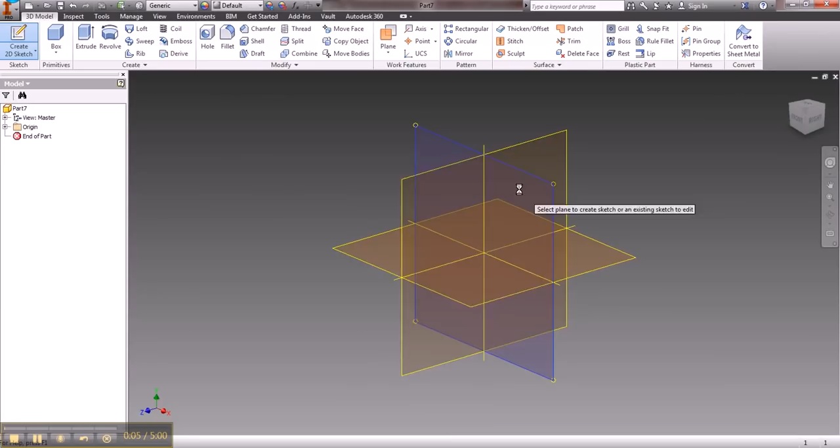Try this from the front. Let's go ahead and start with a new part file. Pick a plane right there, and draw a rectangle first.

Now this one's going to get a little confusing, so make sure you follow it step by step. So this one's supposed to be 3.17, and this one is supposed to be 1.53 tall.

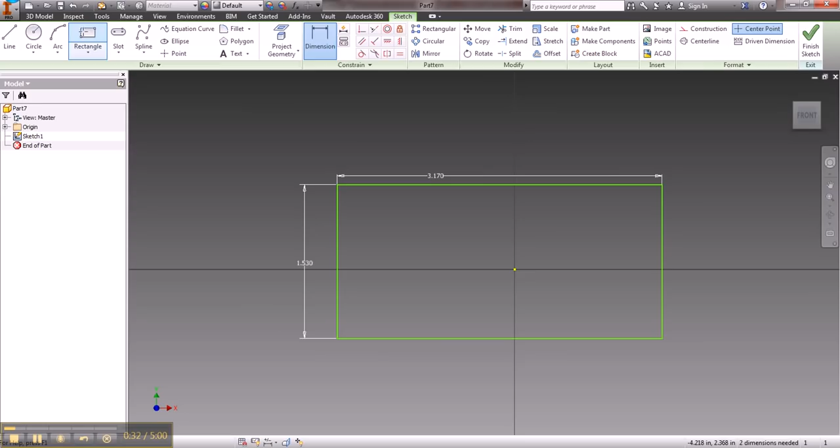Now before we go, we're going to have to draw two little squares here, and we'll use that for later on. So I'm going to go here, make a square, make sure it crosses that line there. Alright, we're going to dimension this here and here.

It's going to be 0.3. Here is a 0.06, and from here to here is again a 0.06. Alright, we're going to trim that like so, and we have to do that on the other side.

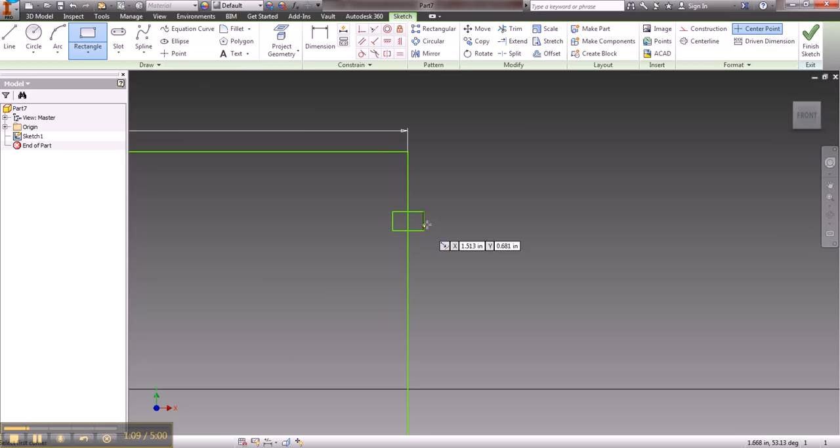Now if you're thinking we could just use the mirror command, we could, except the computer won't like it and you won't be able to use it later on this side. So we're going to do it this way so it'll work out better for you.

Okay, so again, this is 0.3, 0. This is a 0.06. From here to here is a 0.06 as well. And then we're going to go trim, like so. Okay, so you have that.

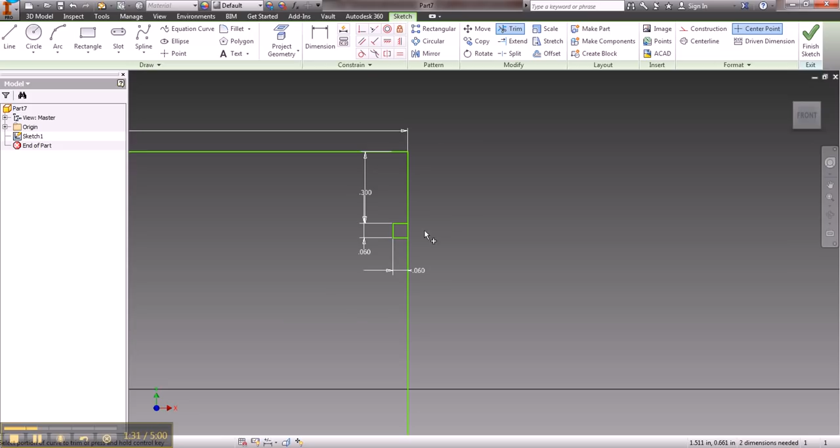Go ahead and finish sketch, and we're going to extrude this. Now, when you extrude this, make sure you pick the squares and the actual surface just like that, so we can use all of it as just one square.

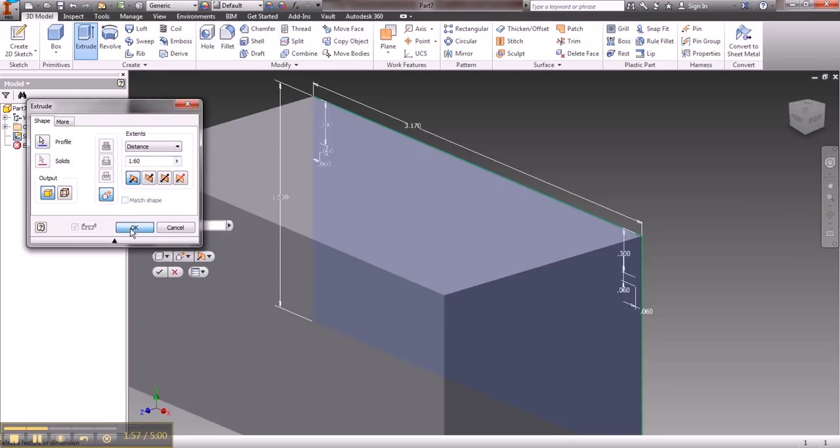We're going to extrude this as 1.60. Again, make sure everything was picked. Alright, hit OK. So now you have one solid block.

We're going to go ahead and fillet the bottom of this, alright, which is this right here, and that's going to be a 0.30. So I'm going to pick that portion there, rotate it around, right there, hit apply, go back to my 2D sketch like so.

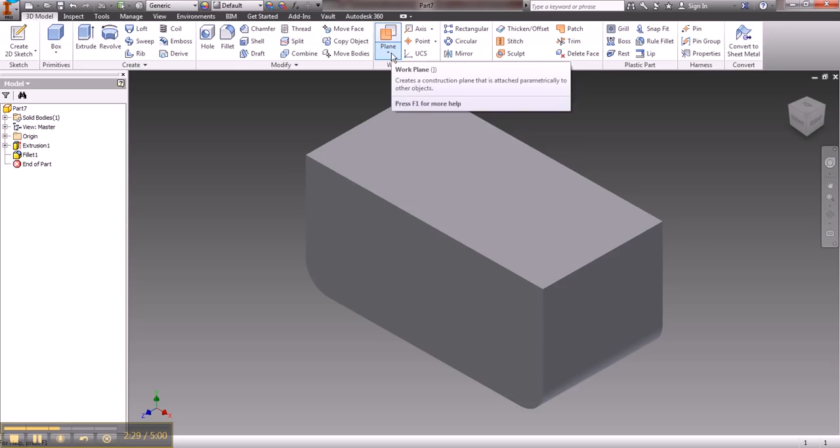Alright, now we got this crazy profile on this, so we're going to use this edge and offset a plane. So what we're going to do now is go here to plane, offset from plane, pick this surface here, and just type in 0.25. Enter. And 2D sketch, make sure you select this plane here, and we're going to draw on that.

Alright, so first thing you gotta do is we need some lines from this so we can actually use them. So I'm going to do the project geometry. I'm going to pick this line here, this line, right, and those, and this one here. Okay, ignore that bell. You should be okay.

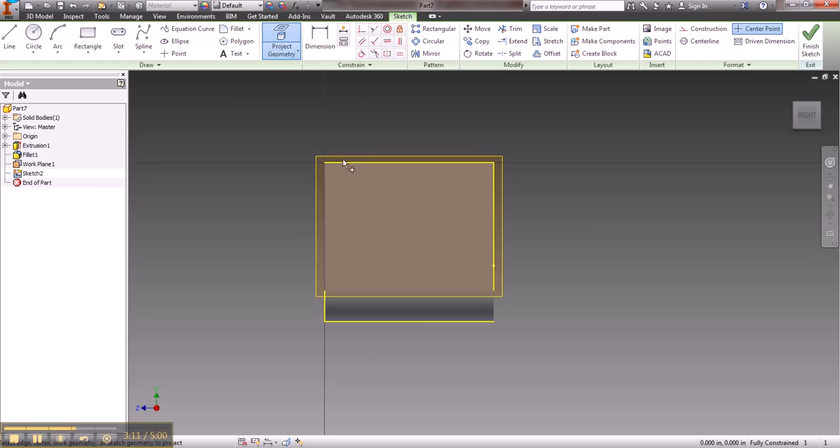Alright, so now we're going to draw some lines here first, just like we did. You can use construction lines if you want. I don't like using construction lines. I just like using the regular lines. So I'm going to draw a line here.

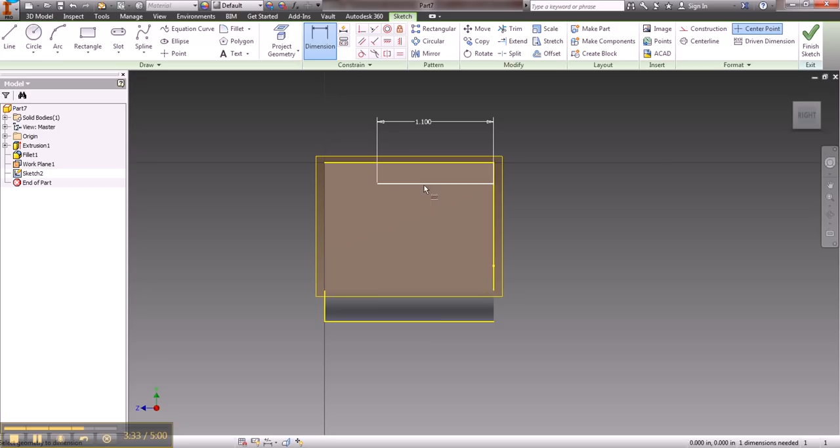Make sure it's nice and horizontal. This line is going to be 1.10 long from this edge, and it's going to be from here to the bottom here. It's going to be 1.25. Okay, draw another line.

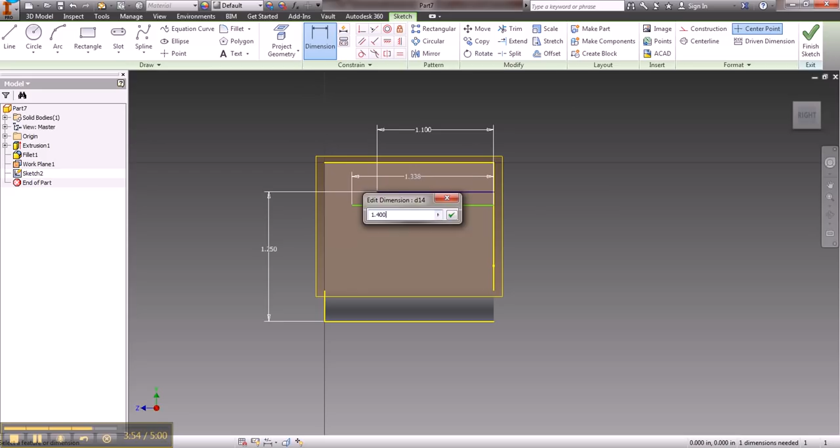Make sure it's not green or anything, just pick that line somewhere. Make sure it's horizontal. Pick that line, and that's going to be a 1.400. And that's going to be from here to here, 1.150. Alright, just like so.

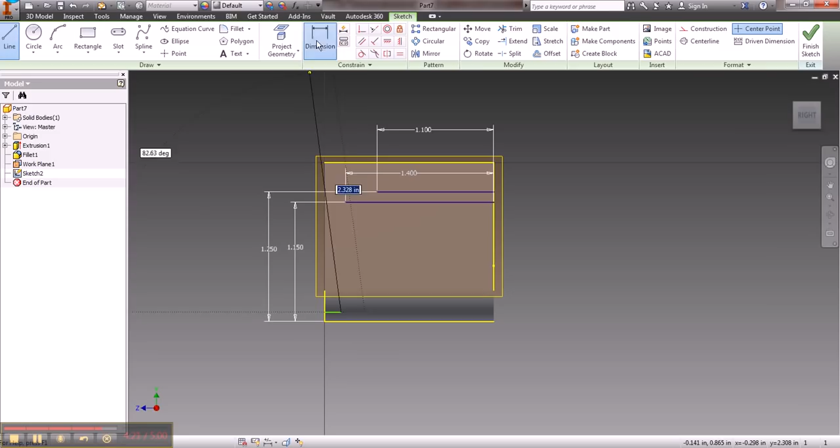Then we've got one more line here. And that line is going to go from right here. Oop, make sure it's not green. Just pick that line from here to here. That's going to go from this point to this point, and I need that to be at 0.2.

Alright, now that we have those lines, we can start drawing our shape. Alright, so we got our lines here now. Start drawing our arcs and our straight lines. So we got arc here, 3-point arc.

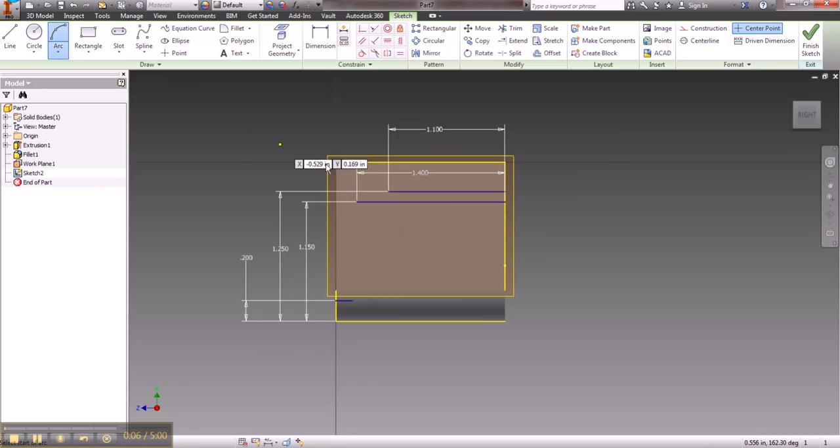I'm going to go from this point here to this point. Make sure it's going out like that. Just like that. And then the dimension there is going to be 2.301. Alright, then I'm going to switch to line.

From here to there. Right, we just connect the dots there. Then back to 3-point arc. Go from this point here to this point. It's going out. And make sure that is a 2.356.

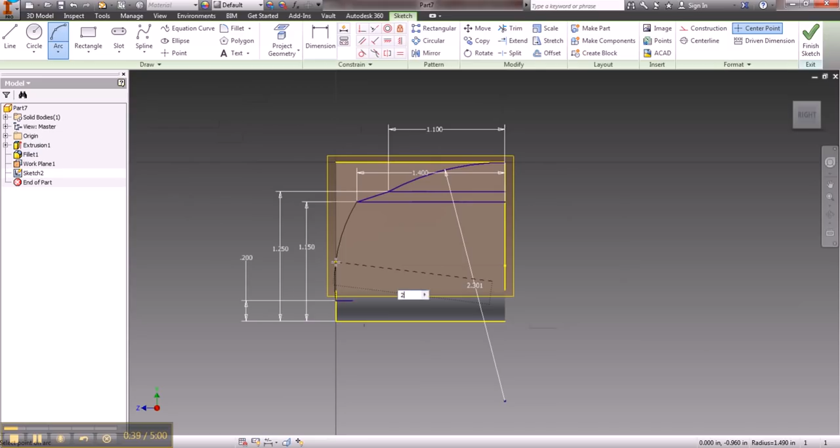Alright, and at this point we can start deleting those horizontal lines we just created. I'm going to go here, delete that, go here and delete that. Then I'm going to need to draw a line, making sure it goes to the end point of that arc right here, to this corner, then from here to that corner, and then back all the way up. So basically what I did was close out that shape.

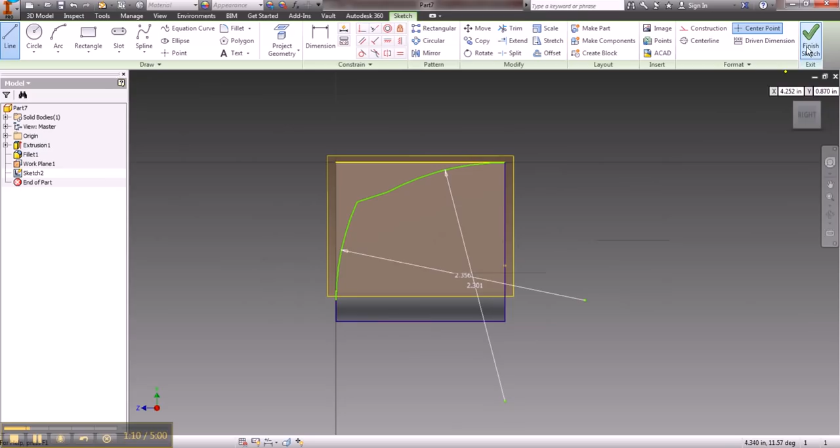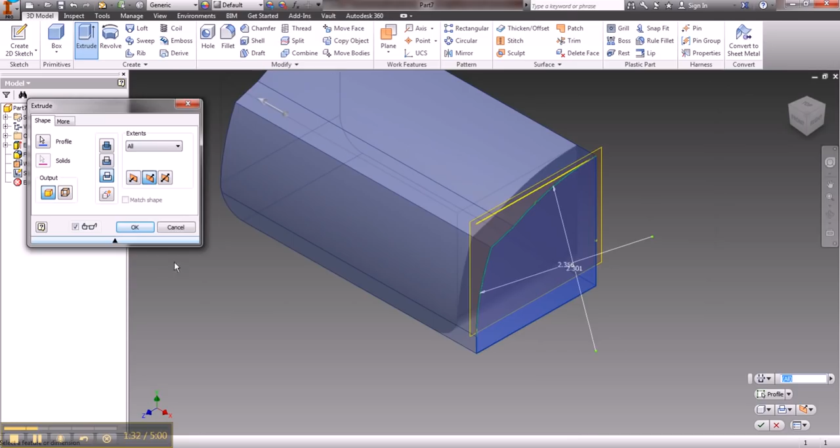Alright, I'm going to hit finish sketch. Now we're going to extrude this, but we're going to use a new command you guys haven't used: the intersect command. What that does is wherever this profile and whatever shape it was meet, it will keep that. And we want to go distance all, so it's the entire length of what we just created. Hit OK, and there you go.

Now if you want to make this invisible, you can, but we're going to use it here in a second again, so just leave it.

I'm going to go to fillet, and go ahead and do point 2 here. We're going to fillet this edge here and this edge. You can't see it, but your computer can, so if you just do that, you should be able to see it. Point 2 right there and right there. Hit apply.

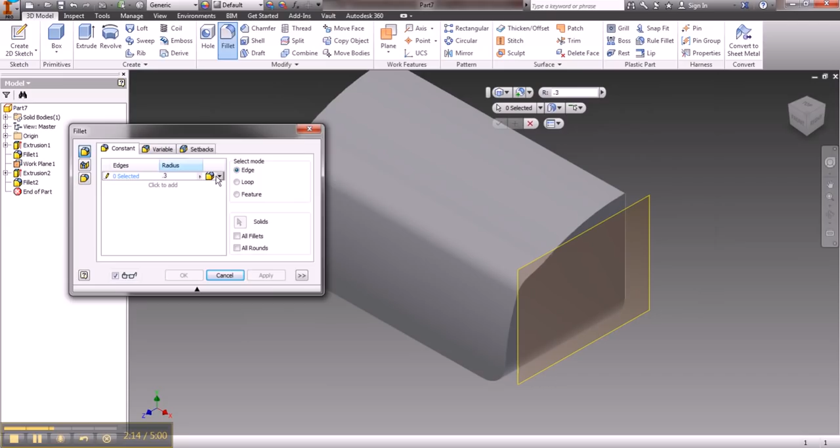Okay, now we're going to do this portion here. I'm going to fillet that again. This one's going to be 0.3. We're going to do the edges now, and it should be one whole edge just like that. It's 0.3. Apply.

And there's that. Now what we're going to do is draw the bottom portion of this. So we're going to use this plane again, 2D sketch, pick that portion there. Alright, and we're going to need a couple of strokes. We're going to use this bottom part here. So project geometry again, use this portion here and that edge there, so you're good to go.

Now we're going to go line. In this one, I'm going to make a line from here to here. I'm going to dimension that from here to here, and that's going to be 1.559. Alright, we're going to need these, and I'll show you why here in a second.

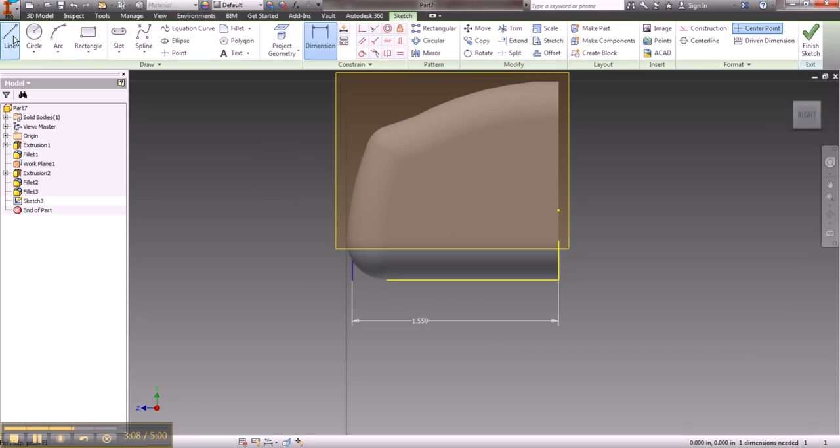It's basically we're trying to draw another shape. Pick this one, again right there, another vertical line. I'm going to dimension this one, and that's going to be 1.51. Right, just like so. I'm going to zoom in a little bit.

Now I'm going to draw a horizontal line, just make it right around here near this. Ignore that bell too, it's alright. So this one, I'm going to go ahead and just put it right on the end point, right around here, right across it, and dimension this from here to here. That's going to be 0.2.

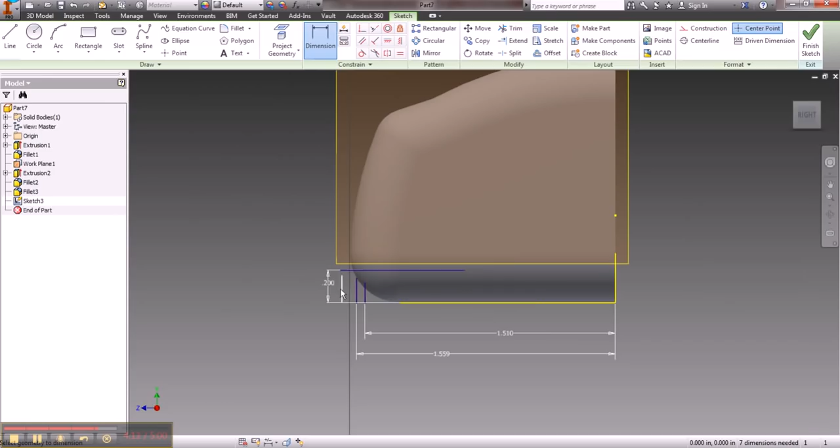We'll need one more line right here, a vertical line just like so. And that line we're going to dimension from here to here, and that's going to be 1.6. Alright, now we got all those lines.

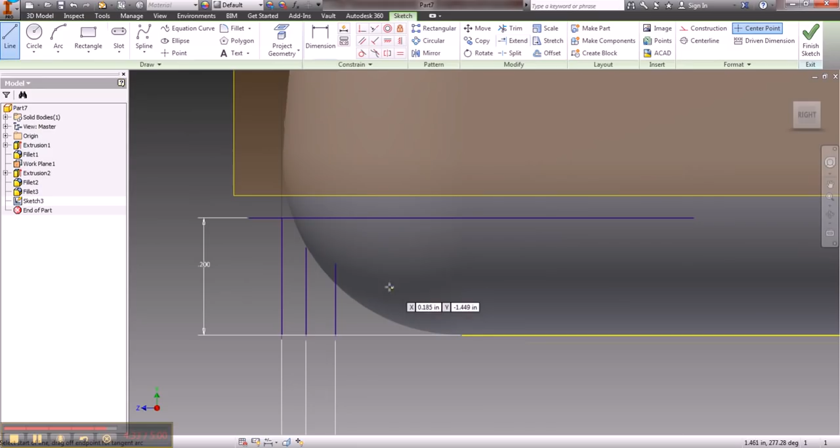What we're going to do is connect those, use the extend command right here, and extend this line - that's the only line you really need to extend. I'm going to put one more line, it's going to be here, and make it connect to this line here. We'll dimension that from here to the bottom, and that's going to be 0.130.

And we'll go to the next slide, or next video.

Okay, so we left off here. Next thing we got to do, I'm going to use the extend command again right up here, and that's just going to extend this line so there's an intersection there. So basically what I'm going to do here is use the intersections here, these points, to make this little shape that we need to notch out a little portion right here. So I'm going to do a line.

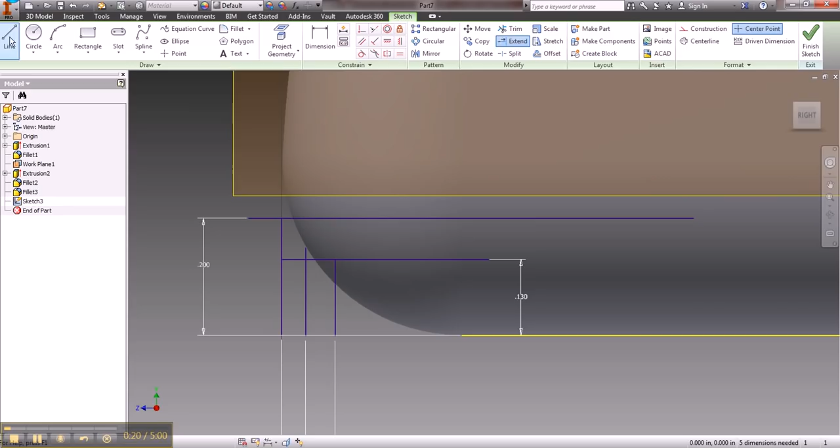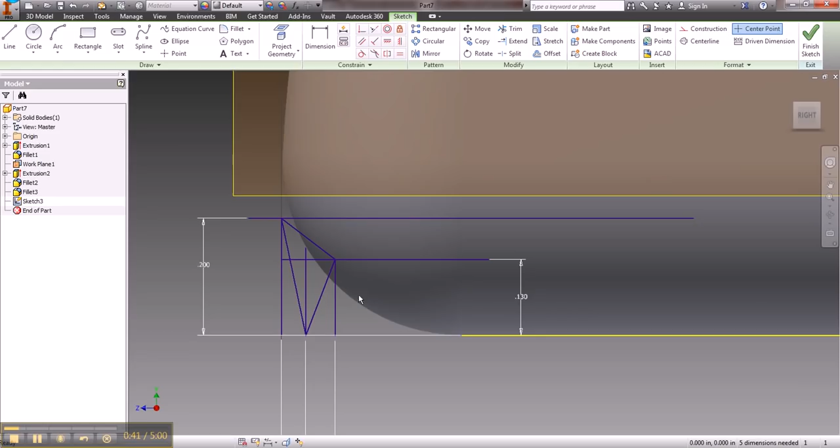I'm just going to go to this intersection right there, to that intersection, like that. And then from here, I'm just going to connect the dots. Alright, and from here, all these lines we can just get rid of now, so we don't need them anymore. Delete that, delete this, and that as well. So you're gonna have this weird little triangle.

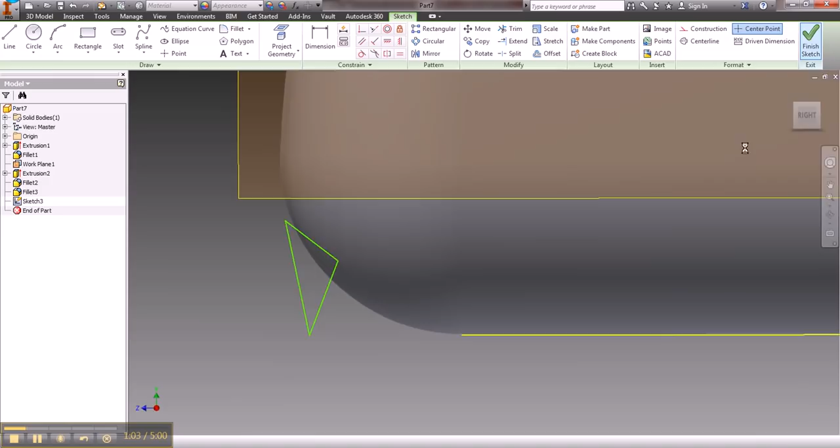I didn't use the polygon command because it's really weird, a weird angle and all that stuff. So just do it the same way I did there. I'm gonna hit finish sketch. Alright, I'm gonna extrude. This time I'm gonna cut distance all. I'll pick that little triangle there.

Okay, so we're gonna select this now. If you can't pick this portion here, you might have to delete this portion here, but you should be able to pick it. So I'm going to pick that right there. I'm going to cut it, distance all again, and you're good to go. Just like that. Again, if you had problems picking that, you might have to go back to the sketch and delete this, or make sure you actually click on profile so you can actually pick that shape.

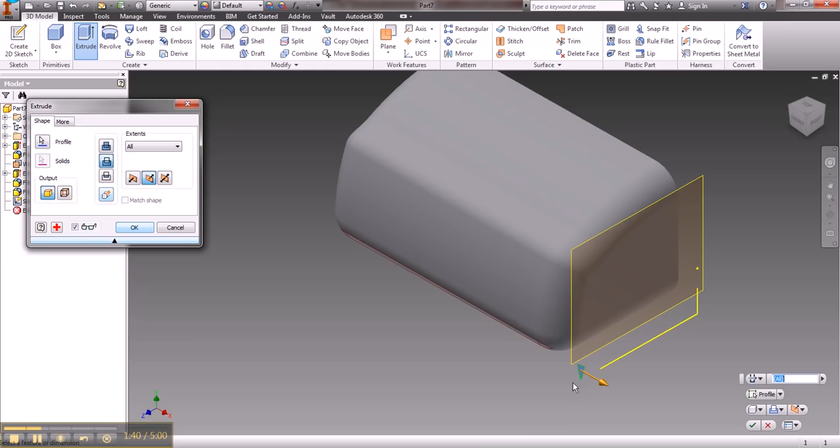Hit OK. And there, we notched that out so it looks like that. So far we have that for our shape. This plane here we're not going to need anymore for now, so I'm just going to go ahead and right click, turn off visibility, and we're done there.

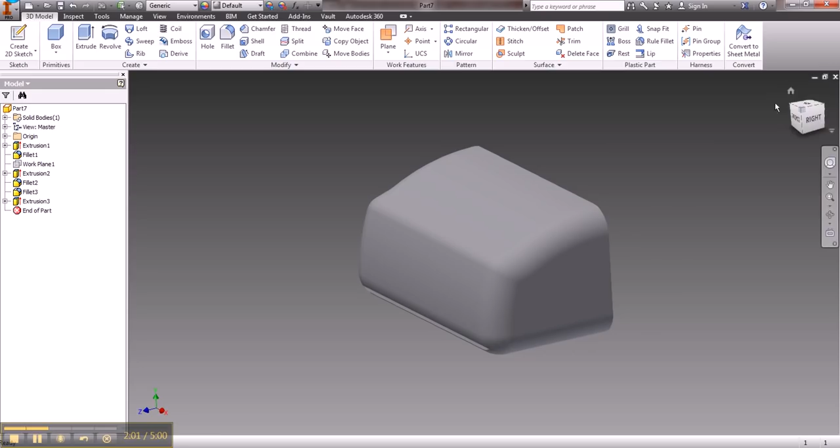Now remember those squares we built at the beginning? I'm going to go back here to extrusion 1, this very first one. We're going to hit that plus symbol in this sketch right here, right click on it and go share sketch. Alright, what that's going to do is let us use it again to make these little squares. So I'm going to go use that one and hit extrude.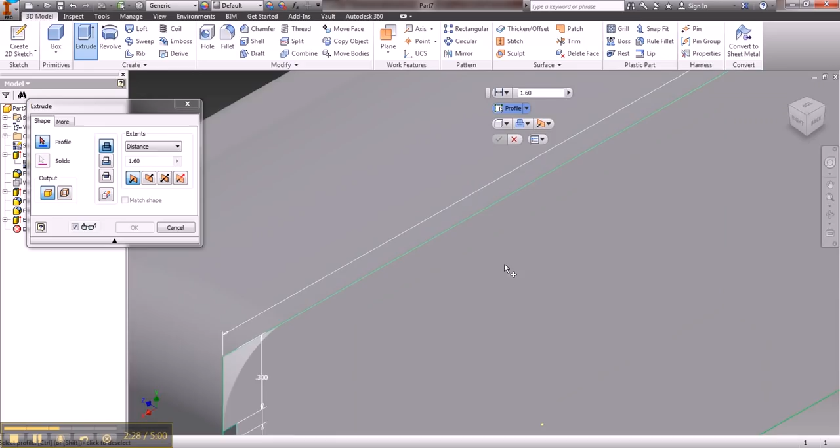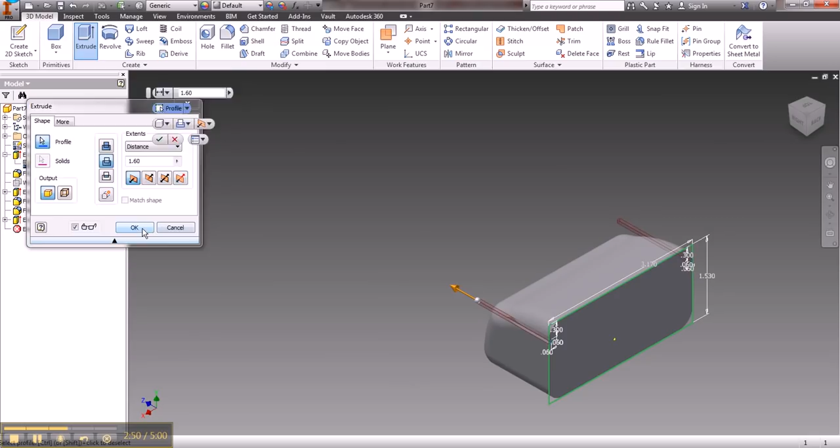And go back here, and we're going to pick these little squares we created earlier, like that. Oops, cancel, hit the entire box on accident. Make sure you pick just a little square, each one on each side, just like that. And we're going to cut it to 1.60, that's what we need. Hit OK. And now we've got that little notch right there.

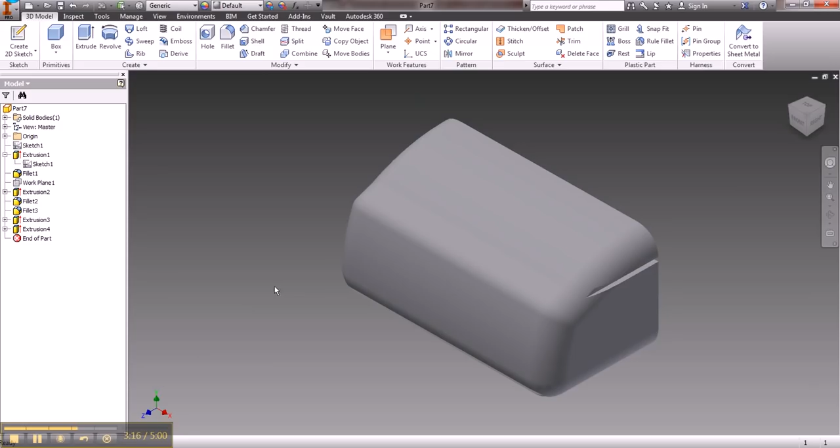That's the way we want it. I'll zoom in real quick, do what it needs to. Now you guys can see it's still visible there. That's okay for now, but if that's going to annoy you, go back here, right click, and hit dimension visibility. Or if you want to just do it all together, just hit visibility, and it'll make all of those invisible, if you will.

So next thing we need is the headlights and the back portion. So we're going to go ahead and do the headlights first. We need to go turn this around to the back portion, right so. Alright, I'm going to hit plane, go to offset plane.

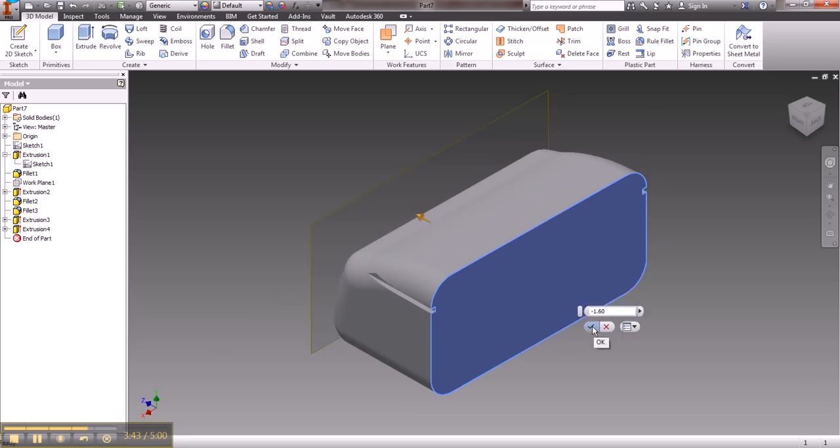You're going to pick this surface. Now, you need to make sure you type this in negative 1.60 because we actually want to go to the front. Alright, so for that I'm going to go ahead and do a 2D sketch. I'm going to pick that surface or that plane, and turn that around to the front, using my little box here, hit front. So there, I've got where I want it.

Now, we're going to use the point command here. We're going to go ahead and set a point here, here, 4 points, and we're going to dimension those here in a second.

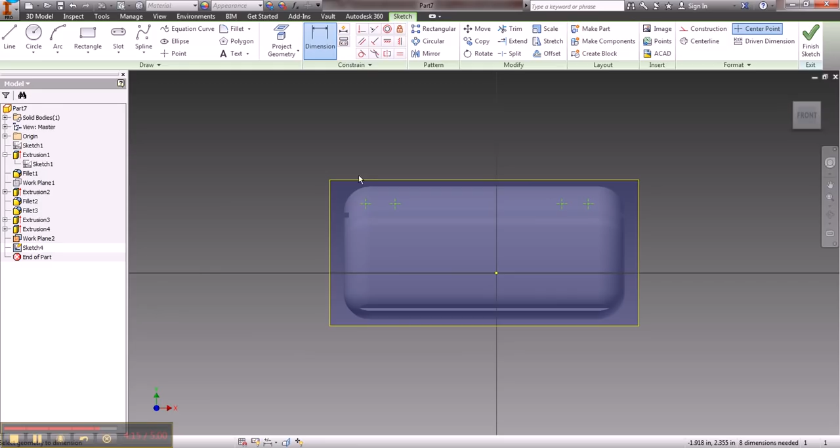So to dimension this, we're going to pick this point, this here, to this surface, or that line, and that's going to be 0.32. Then from that point to this point, it's going to be 0.27.

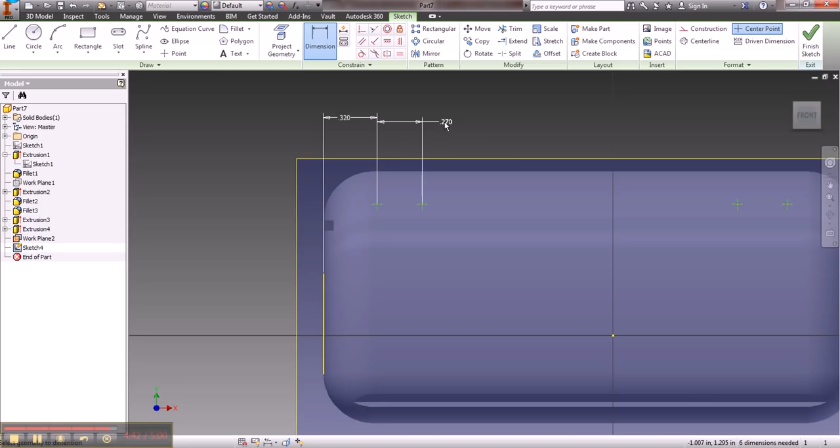Alright, gotta go to the next video. So that was a 0.27 right there. Now we gotta dimension it from the bottom. We're gonna pick this again from the bottom here.

And that's going to be a 1.35. Okay, so that's a little skewed. So dimension this part here to that same point, 1.35. Alright, and that should be good.

So we have to do the other side as well. Again, we're going to dimension it here to this edge. Was a 0.32. From here to this one, it's going to be a 0.27. And from the bottom,

1.35. Here, 1.35 too. So it's good. Alright, now you got to make sure they're in the proper distance apart.

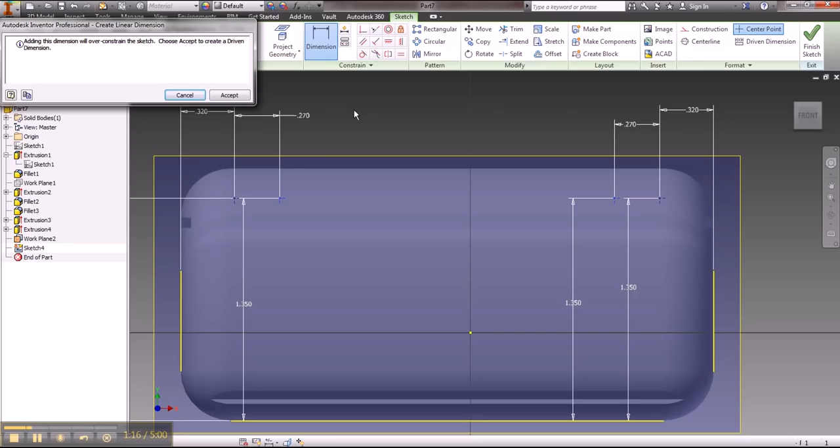So we're going to dimension this point here to this point, and that's supposed to be 2 inches. Okay, it's got it right there, so you're good. You don't have to worry about that. So as long as you have dimensioned those, and it should be centered in.

So we're going to hit Finish Sketch. Flip it around so you can see it again. I'll zoom in a little bit so you guys can see it a little bit better. Now we're going to use the hole command here, and what we're going to use is we're

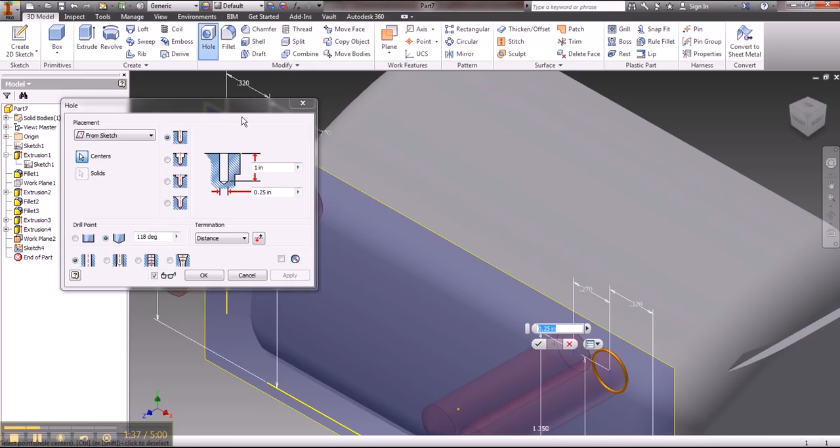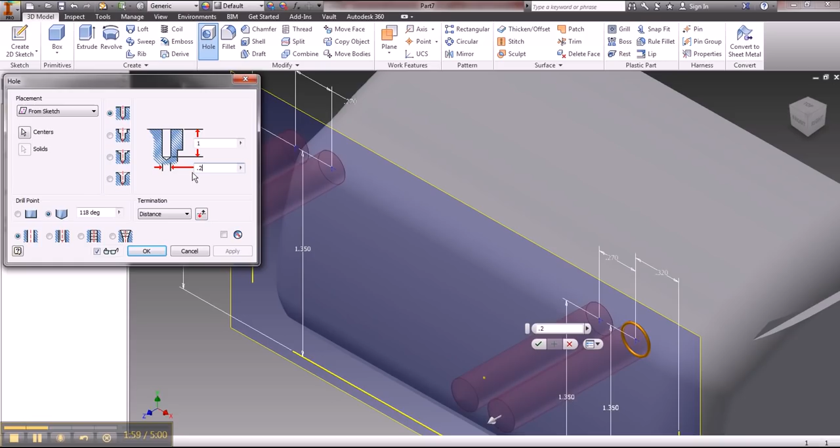going to change some of the measurements here so we can actually use them, and it'll be going to our front. So this one here is going to be 1. Keep that 1, and this one's diameter is going to be a 0.2. Make sure you have it on the angled edge here.

Now notice that this is actually going away from it. Right here I want to just go and flip it so it's actually hitting to my car. So when that hits there, it's going to cut it. Okay, and there you have the headlights, if you will, of the front.

I'm going to right click on this, click off visibility. I'm going to do the wheel axles now, or for the wheels. So it'll be the same process as the holes there.

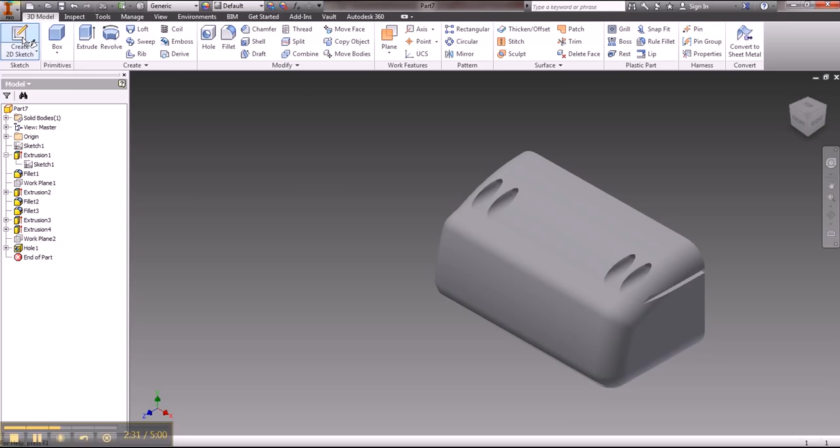We're going to do a 2D sketch like so, right there. Get a point, just going to throw it there somewhere. I'm going to go ahead and dimension that from the bottom. The center that's going to be a 0.30. Go back there to this point, and that's going to be a 0.5.

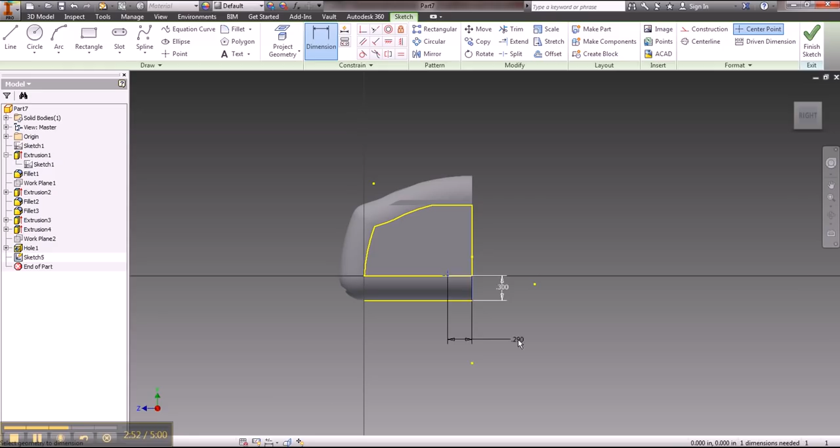Like so, I'm going to finish sketch. I'm going to go to hole command again. This time around we got to change this to a 0.35. Okay, and this one's going to be a 0.29. Alright, make sure it's going into our car.

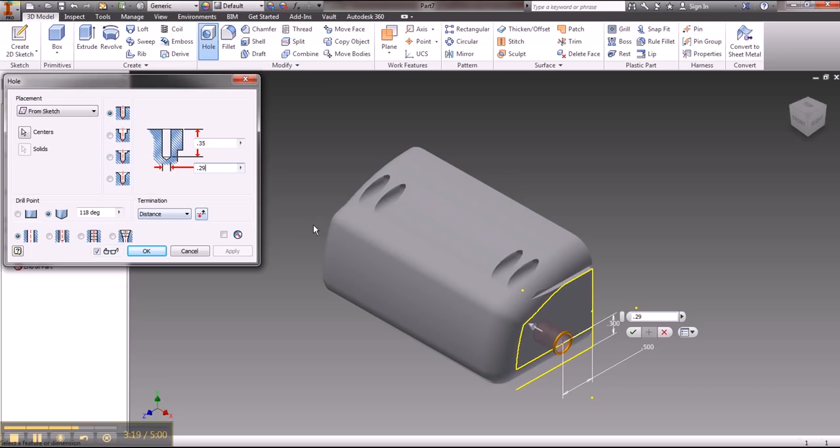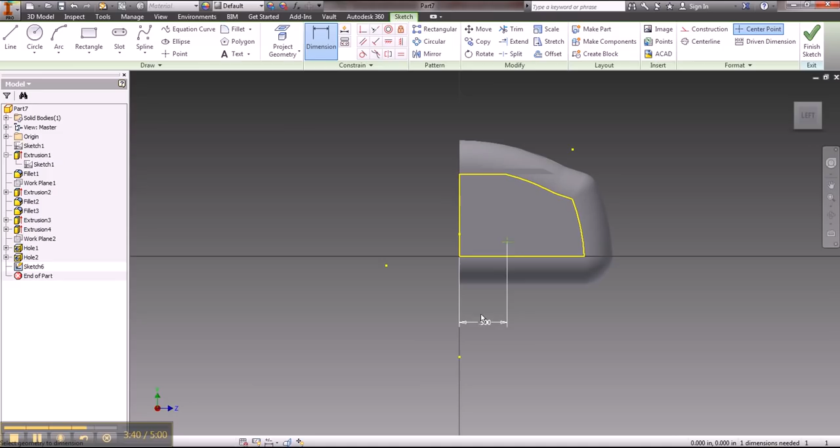Okay, boom. Now we got to do that to the other side as well. So again, 2D sketch, click on this, same dimensions as last time. So we're going to use the point command, just plop that there. Dimension from here to here, it's 0.5, from here to here, it's 0.30, and then finish sketch, hole command again. It should still have the same measurements, hit OK, and there's your axle.

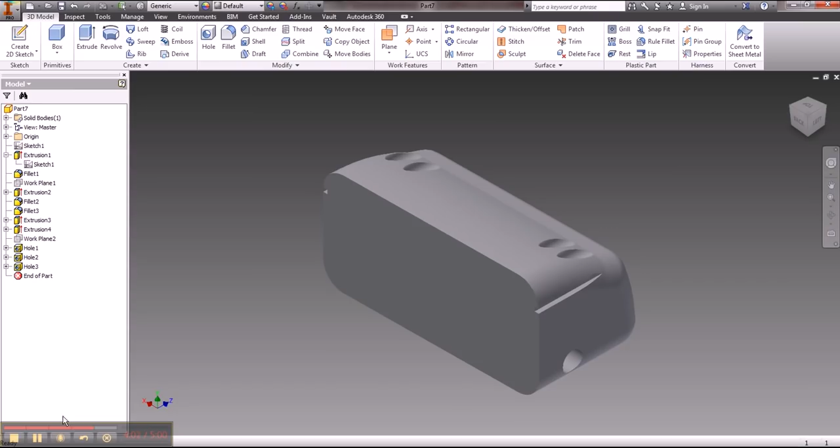So the last thing we got to do now is put the little portion here, and it will be done. Okay, and we'll do that on the next video.

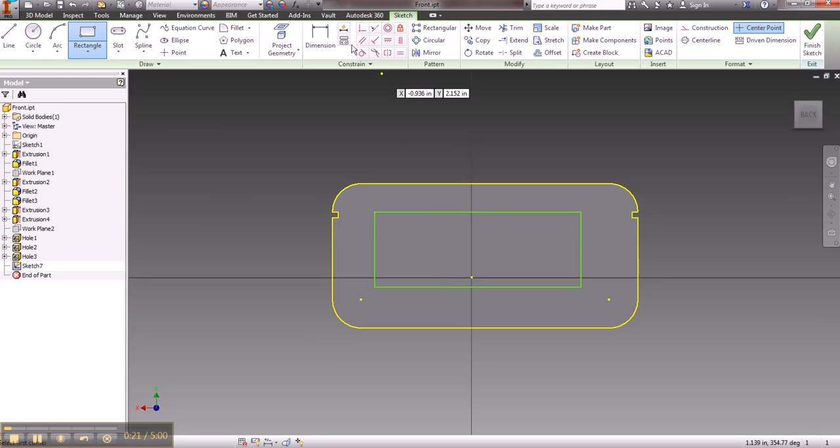Alright, so we just got to do the back portion here. So what we're going to do is 2D sketch right on there. Alright, just like so, and draw us a little rectangle. We're going to dimension it out so it doesn't really matter exactly where. So here, from this top one to here, that's going to be a

0.30. From the bottom, there is again a 0.30. From here to this edge is a 0.39. And then of course from here to this edge is a 0.39 as well.

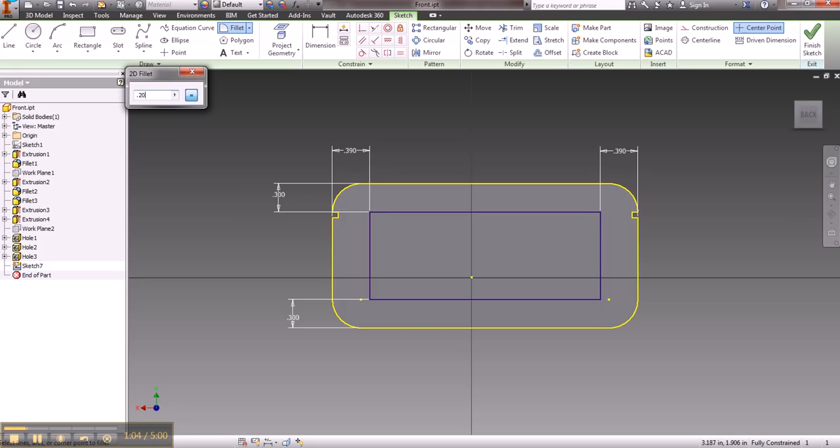Okay, so once you have that, you can go ahead and fillet the shapes in here in this sketch, and that's supposed to be a 0.20. We'll go from here to here, here to here. Just like so. Finish sketch.

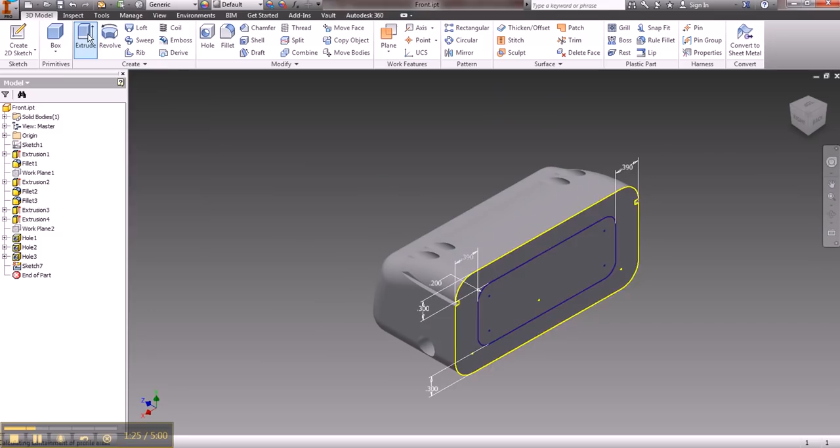Show you guys that. Extrude. We're going to pick that surface there. We're going to cut into the block, and we have to go in 0.57. Extrude, and that is done.

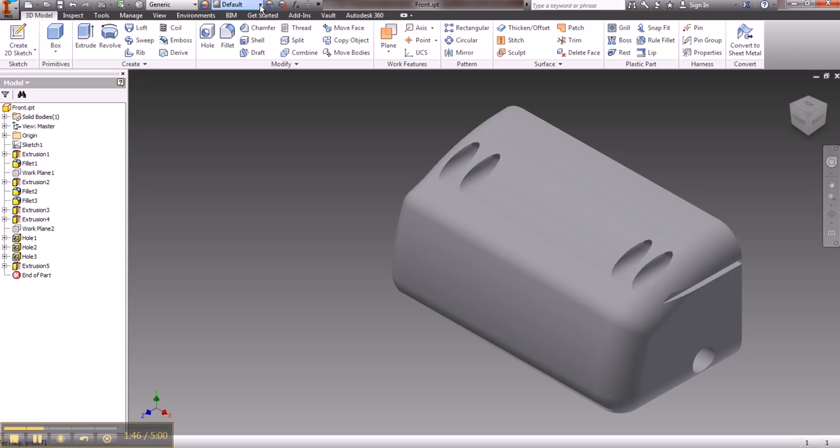Then of course you can change the color. I believe my color was a blue color, and again, any color you want on there is fine. If you find the blue, find the blue. Alright, but that's up to you. It should be good.